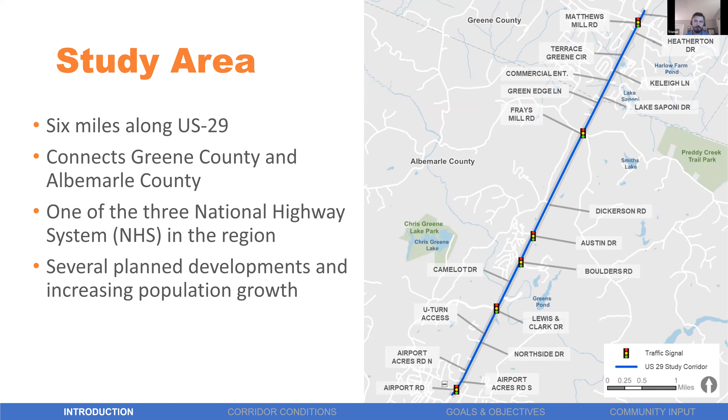Sandy, quick question - I don't think this is up for any kind of approval, so I don't think we have to motion for anything. But before we move forward, does anyone else from CTAC have any questions or comments? Awesome, I think we're good to go.

Sandy, I did want to point out that we skipped the attendance piece. I was wondering why we were so efficient. Yeah, we can go back and do that, but I think we were able to capture everybody that came in. But if you'd like me to formally take attendance, I'd be happy to. Oh, if you already got it, that's fine. Yeah, Gretchen, are you good? She said she's good, so awesome - feel free to keep moving forward.

All right, thank you. Well, if there's nothing else on the North 29 corridor study, thanks Lucinda for that. As far as the next one, we're going to the roundabout operations - Chuck, I believe this is with you. Yeah, let me share my screen real quick here.

All right, everybody see my screen? Okay, I've got like 9 slides, but 2 of them are pretty short. I'll basically go over a brief history of roundabouts, then talk about what a roundabout is, how it operates, what you want to consider, and some of the benefits we see from roundabouts.

So for a brief history, they basically came about mainly in Europe. I think the first one was built in Germany around 1899, and they were built mostly like you see the Arc de Triomphe in Paris, France, which has a lot of connotations in movies and stuff. But basically they were a circular intersection.

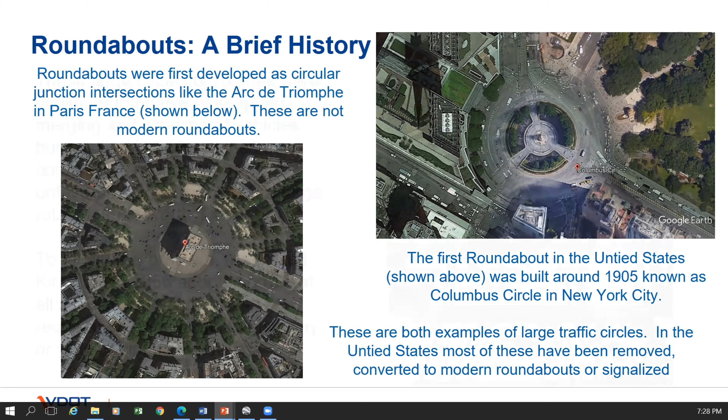This is another example of a rotary type of roundabout - it's a large, high-speed roundabout located in Fort Worth, Texas. We don't really have any of these in Virginia - most have been converted to the more traditional roundabouts that are popular today.

In 1966, one of the issues with these roundabouts is that they're high speed - nobody knows on the entryway what the controls are, so there's a lot of merge and weave issues. So around 1966, the UK adopted a rule for roundabouts that basically the circulating lanes had the right of way and entry lanes had to yield to circulating traffic. That basically set the criteria we use for all our roundabout designs even today, and set the stage for the modern roundabout.

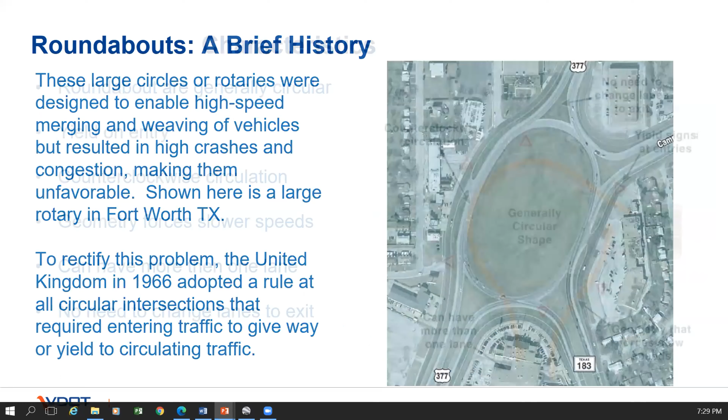Oh, I went the wrong way, sorry about that. Some characteristics of a roundabout: they're generally circular, some can be oval, some are peanut-shaped if you've got offset intersections. They can be 1 or more lanes. You yield on entry. In this country, you do counterclockwise circulation - I know in England it's clockwise just because they drive on the wrong side of the road.

Another thing about roundabouts is that the curvature of the road and the roundabout size requires vehicles to slow down before they get to the roundabout and enter it. Once you go into a roundabout, you don't change lanes, and the lane directs you where you want to go. If you want to make a left-hand turn, you need to be in the left lane before you get into the roundabout, or you're not going to go there. So those are just like they are at regular intersections.

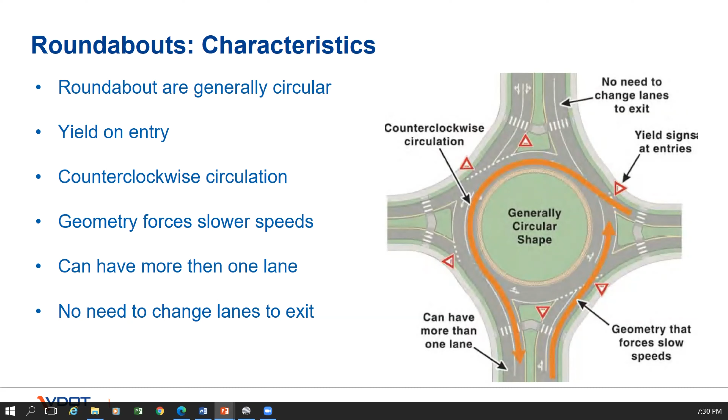For consideration, you want to look at intersections that have similar traffic volumes or heavy left turn volumes—those are where roundabouts function the best. If you have an intersection with high angle crashes or a lot of head-on crashes, those are crashes that will basically be eliminated by the roundabout.

If you have constraints on storing vehicles, that might be another consideration. You want to put them where you have limited driveways. If you have a lot of access points right close to the intersection, they won't work very well with a roundabout. And if you have an adjacent signalized intersection that may queue back into the roundabout, that might not be a good location for one.

This is a roundabout pictured here in Palmyra that we built. It was opened probably three or four years ago.

This roundabout, as you can see to the right side of the screen, has a bridge over the Rivanna River. There's a planned development on the south side, and it couldn't have its access off of a traditional intersection because it didn't have a way to store traffic and construct a left turn lane without having to widen the bridge. So we recommended a roundabout for this location. They worked with the county and submitted this one for funding through Smart Scale, and were able to get funding for it and got it built.

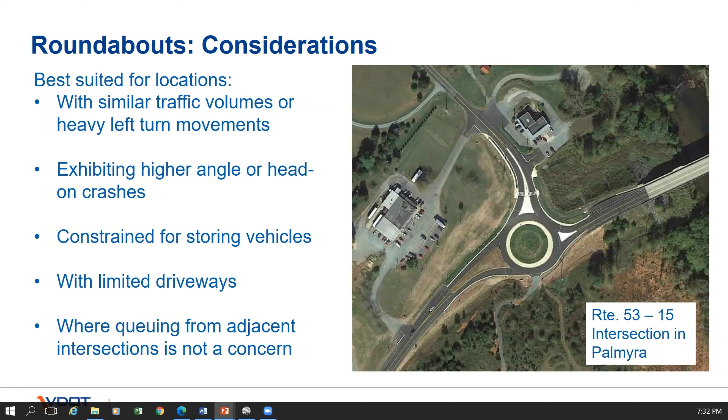This is another roundabout in the town of Culpeper, and some of the benefits of roundabouts: you get improved safety by reducing the conflict points from a traditional intersection. You've got somewhere around 48 conflict points, and this reduces it to somewhere around 6 or 8. Depending on the lanes it may be a few more, but it's a significant difference in the number of conflict points.

You also get lower speeds, which gives you more reaction time, so if you do get put into a situation where you might collide, you may be able to stop in time to avoid a collision. Roundabouts are a lot more efficient than a signalized intersection, because you're basically just yielding on entry, so you don't have to stop a lot of traffic, and it operates more efficiently. You have shorter queues and much less delay, and they operate further into the future than a regular signalized intersection would. Like I said, the speeds are slower because you're slowing vehicles down through the road geometry and entry curves.

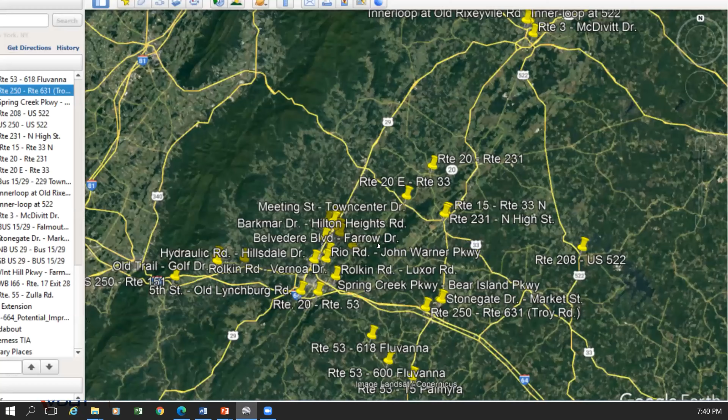Thank you, but let me show this. This is a shot of the Albemarle area showing the number of roundabouts we've either built or are in the process of building in and around this region, just to give you an idea of what we've got here — a significant number. Yeah, we have quite a few, both in rural settings and in urban settings.

Sorry, Tristan. Oh, it's all good — I had a question though. We were only talking about benefits. As far as negative impacts or reasons we wouldn't build them, I recalled from previous smart application discussions that you need some kind of interruption or calming before one can get into the intersection — dealing with the intersection near Whole Foods, Hydraulic, that whole thing. I was wondering, in what cases is it not a good use case?

If you have a lot of through traffic — a large volume of through traffic — basically if you don't have traffic that turns, it doesn't work well, because you're yielding to the vehicles in the circulation lane. If you don't have a lot of disruptions in the through traffic flow, the side streets won't be able to get in. That was the problem we were concerned about with Hydraulic — the volumes of traffic without having any left turn movements, or with limited left turn movements, may make it hard for people from Hillsdale to get into the roundabout, if that makes sense.

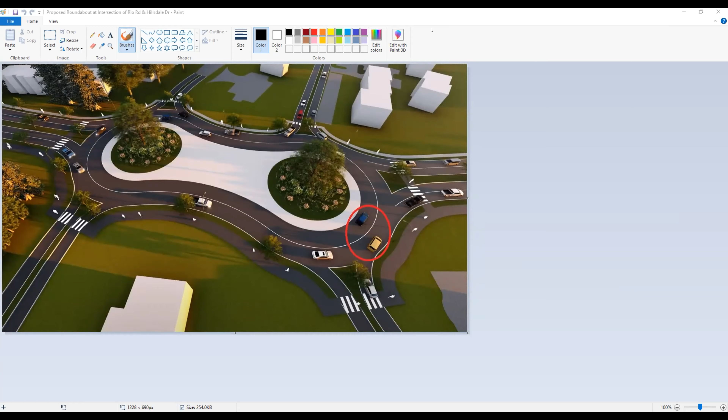Let me go back and share my screen and I'll show you what I'm talking about. Let me go back up here.

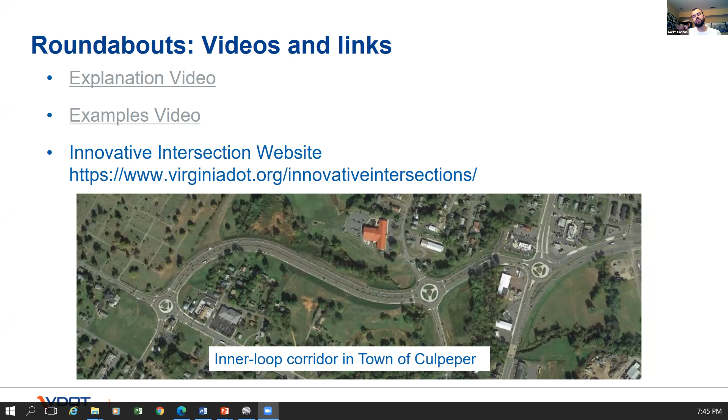Can I jump in with something real quick? Hi everyone, my name is Kareem Habab. I'm joining as a member of the Planning Commission, and I'm glad to join the advisory committee. I grew up in Amman, Jordan, where roundabouts are everywhere. For that picture, the way we drove there, the people inside the roundabout on the inner portion always have priority. So if you're on the outside, you always have to pay attention to who's in front of you on the left-hand side; if they want to exit, you have to yield for them.

The way we try to do it—this is one of the hybrids we have, in the town of Culpeper. You can see how in this case you've got two entry lanes coming from the business. The inside lane is the left turn lane and basically goes straight through then is guided out of the roundabout, while the outside lane can go through or make the left. In this case, the inside lane couldn't exit at that point straight through to the north—it can only make the left-hand turn. So the way we do the markings in the roadway, we're basically guiding the traffic through the roundabout to the points we want them to go.

We will even use spiral curves to guide them out to the outside if we want them to go that way. Those are things we incorporate. We have very few multi-lane roundabouts. Because of that issue, the one up in Gilbert's Corner in Northern Virginia was originally a multi-lane roundabout, and they reduced it because people were switching lanes in the roundabout when they wanted to make a left turn and couldn't do it from the outside lane. They were switching in the roundabout and causing a lot of crashes at the entry and exit points, so this is a way to try to limit that.

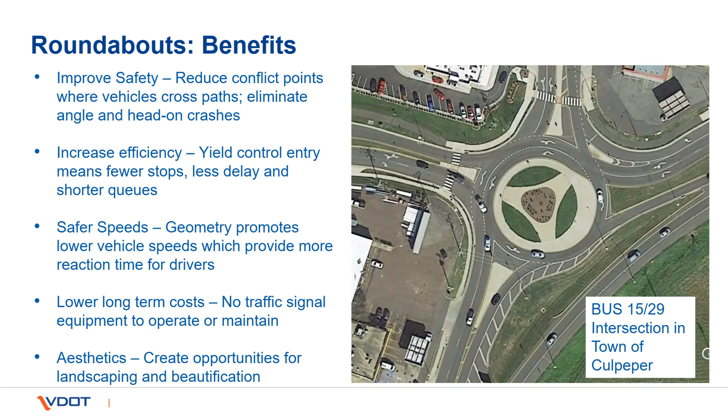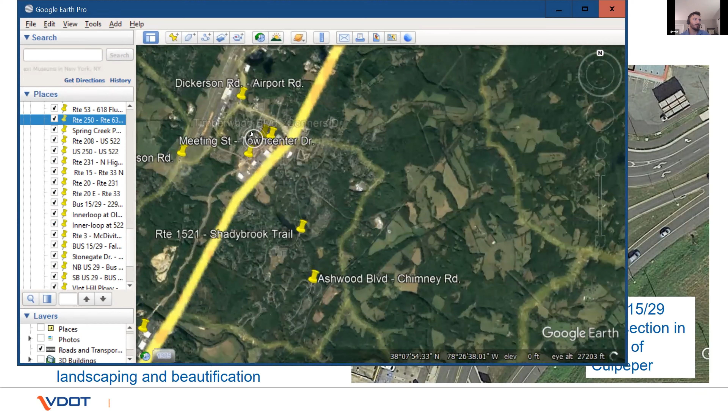I can zoom in here real quick and show you the ones at Hollymead - I was going to mention Berkmar and Town Center. I'm following along on Google Earth, and it's a perfect example like you mentioned. Here's one of the ones at Meeting Street and Town Center Drive, where you have the slip lane here, then the single lane roundabout, and then a slip lane here. The same is true for this other roundabout here.

This is the one at Timbrewood and Meeting Street. You've got the slip lanes here, where you're dropping the lane and then adding the lane here. So it just depends on the volumes and the design of the roundabout, what you're going to have, whether you need those or not. We look at it on a case-by-case basis.

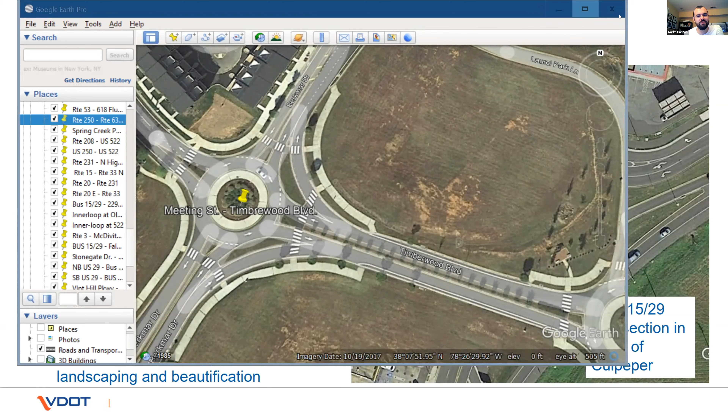Quick question, this is Kareem again. I do want to say that I am all for roundabouts where we can do them safely. They definitely help with traffic flow, at least in my experience. I was wondering, instead of having a 4-way intersection with stop signs, have they considered smaller roundabouts on that smaller road, neighborhood scale? Is that a thing - what are your thoughts on that, I guess?

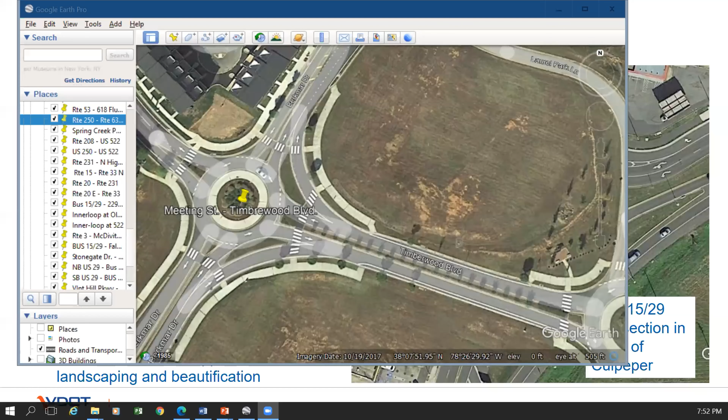I can show you some. We've got one of the first roundabouts that was built in Albemarle County by a developer - it's basically not really a mini, but it's close to a mini. It's in the back of Ashwood subdivision. It's right here.

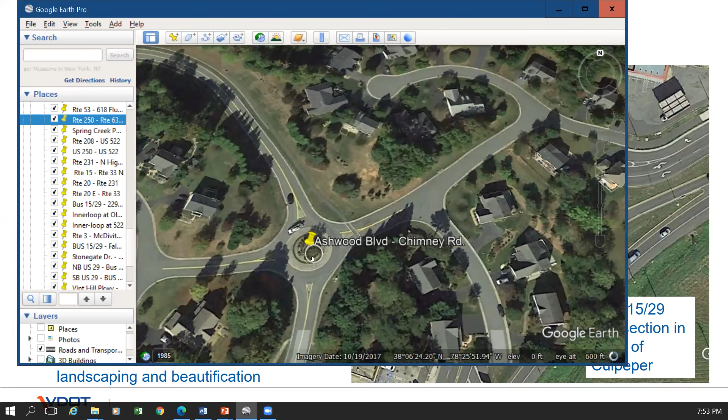This is 90 feet across right here. And this is almost a mini roundabout, a little bit bigger than a mini. We have another mini that was built in the town of Warrenton that's really small, like this. It has a completely mountable center island and a slip lane on one of the approaches. I don't have a picture of that one because it was built so recently that they haven't updated Google with the imagery yet.

But we do consider those in residential neighborhoods where you've got lower speeds and the volumes aren't as high, and especially if you don't have a lot of truck traffic, because it's harder for trucks to make the maneuvers through those since they're so small. But they can still handle it. I know the one in the town of Warrenton, a tractor trailer actually made a U-turn at the roundabout and was able to do it. I wasn't there to see it, but I was told they made the maneuver, so I was really impressed.

So we look at all those, and there are some instances where we do consider those smaller types of roundabouts. You can have really small ones, to where it's just like the size of a dining room table in the middle of the road at the center of the intersection. In those instances, trucks would not necessarily drive through like they would a normal roundabout. They would go in front of it making the left-hand turns, because it's not big enough for them to operate normally. But passenger vehicles and smaller vehicles would use it just like any other roundabout.

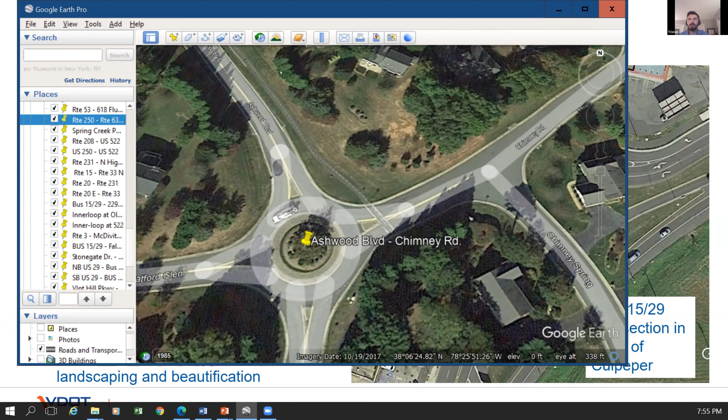I think we're next ready, Sandy, for the Smart Scale Round 5 Stakeholder Committee piece. Yes, so as you all remember, I have a roadmap we've been looking at as we've been talking about the smart scale process that the MPO has undertaken in order to select and prepare applications for the next round of smart scale. The MPO did select the 4 projects they would like to move forward with, those being the 4 we had discussed in this meeting previously, which included the Rivanna River Bike and Pedestrian Crossing, the roundabout based on the hydraulic project, and then the District Avenue roundabout.

And then the 2 bike and pedestrian corridors that we were looking at, which included the Avon Street bike and pedestrian infrastructure improvements throughout that corridor, and then at 5th Street, looking at some intersection improvements at the 5th Street station intersection, as well as some extensions of the bike and pedestrian infrastructure.

As you'll recall, one of the things we had offered to do as part of the MPO, and that we were recommending, is that we could identify 1 to 2 of those projects that would need additional stakeholder engagement. The MPO Policy Board did vote that the Rivanna River Bike and Pedestrian Crossing would be one of those projects.

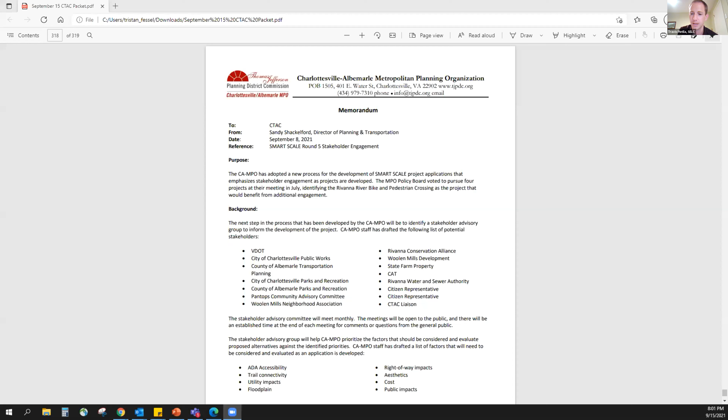I did have a couple thoughts on groups. One I noted, I think Charlottesville has a Bicycle Pedestrian Advisory Committee. I'm wondering if someone from that group may be a good addition, given this would be mainly a bike-ped crossing. Another question, which maybe Kareem or Daniel had thoughts on, members of the City or County Planning Commission, possibly? Oh yeah, and that's it for me.

I think that makes sense. Yeah. I'd agree with that. This is Daniel.

This is going to be related to bike and ped, correct? Don't we have a specific bikers group that is represented with the county and MPO? We have a bike and pedestrian coordination committee that consists of staff, so they would be represented by those other staff-type positions, like the transportation planning and parks and rec types of memberships.

Regarding your comment, Travis, on the citizen representative, I was thinking that probably at least one of those would be based on that bike-ped committee at Charlottesville. Makes sense, yeah.

I think you should have somebody that has some knowledge of bridge design, because the bridge designs are going to make or break this program. The bridge design I proposed, I think I could do the project for 8 million instead of 12 to 13. So I'd volunteer if I could, but if not, you should at least have somebody that understands the basics of bridges.